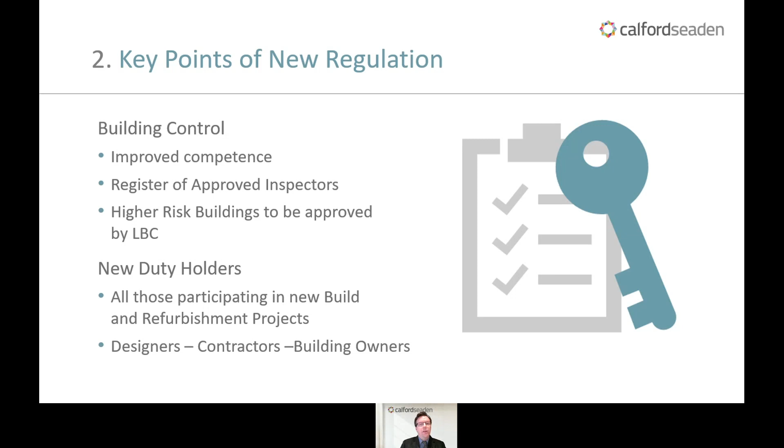Building control will undergo reform through improved competence. There will be a register of approved inspectors, and all work to high-risk buildings will need to be approved by local building control and not an approved inspector. There will also be a list of new duty holders, which will include all those participating in new build and refurbishment projects and are defined as designers, contractors, and building owners.

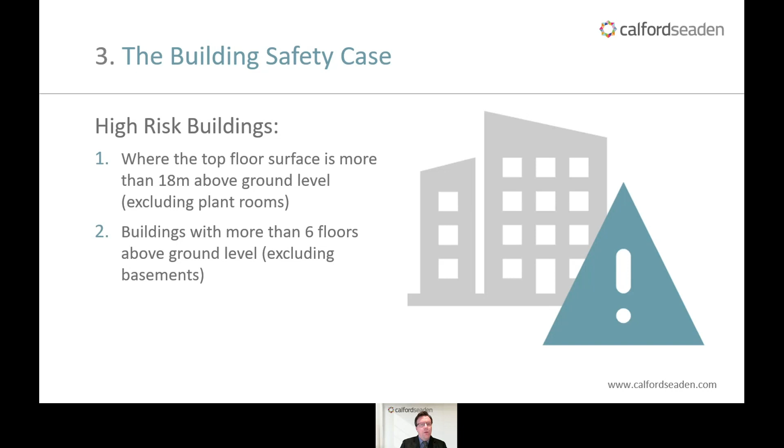The building safety case encompasses and is effectively the golden thread. It will only relate to high-risk buildings, which are defined in the bill as buildings where the top floor surface is more than 18 metres above ground level, excluding plant rooms, and or buildings with more than 6 floors above ground level, excluding basements.

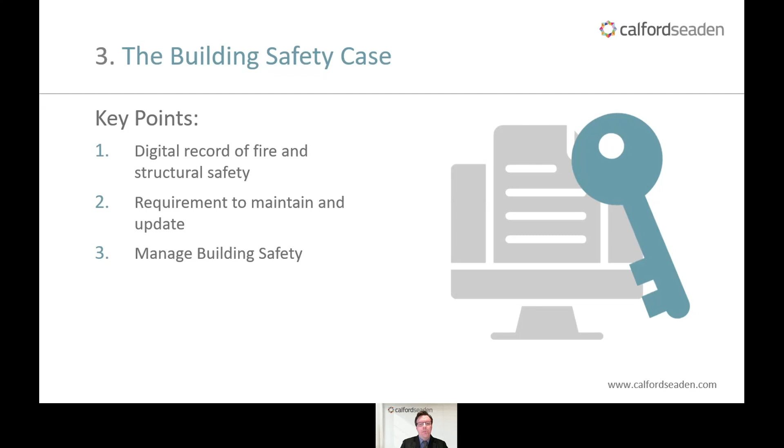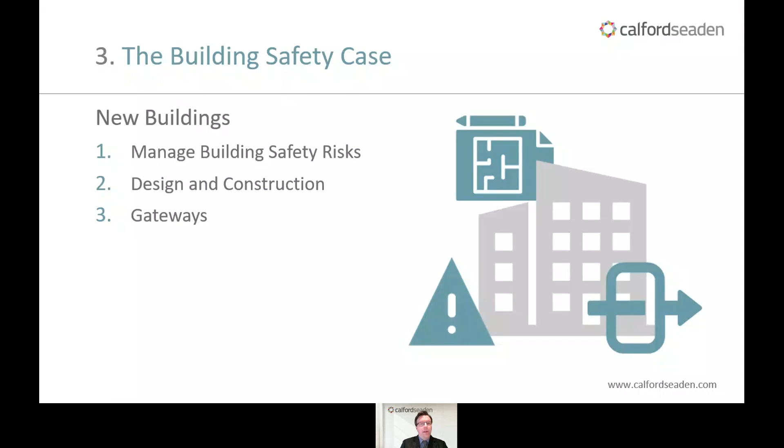The key points of the building safety case are that it is a digital record of fire and structural safety. There is a requirement to continually maintain and update the information, and the purpose is to provide the person responsible for the building with the information required to manage building safety throughout the life cycle of the building. In new buildings, there is a requirement to manage building safety risks at all stages of design and construction in the form of gateways, and Bob and Varun will discuss these in more detail later in the presentation.

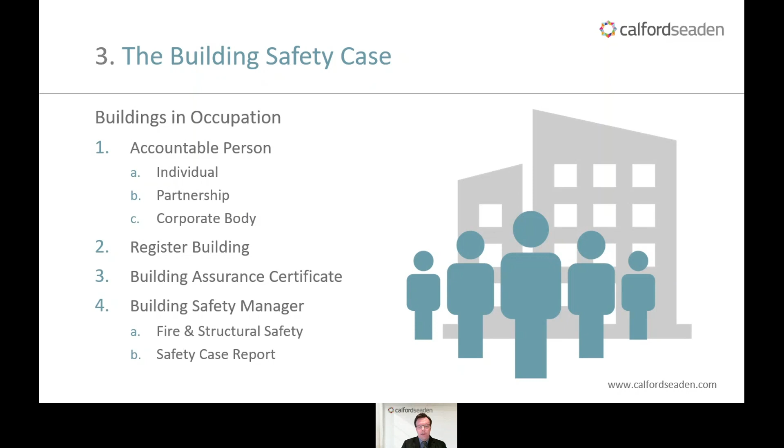For buildings in occupation, there is a requirement for an accountable person to be put in place. There may be more than one accountable person, and these can include an individual, a partnership, or a corporate body. They will be responsible for registering the building and applying for the building assurance certificate. Finally, the accountable person will be required to appoint a building safety manager, who can be an individual or organisation, and their principal role is to assist the accountable person in the day-to-day management of fire safety in accordance with the safety case report.

The safety case report is the document issued to the building safety regulator to apply for the building assurance certificate, and makes the claim and argument for residential safety and answers the question: can you identify the building safety risks in your building and show me how you manage these on an ongoing basis as far as you can so that it is safe.

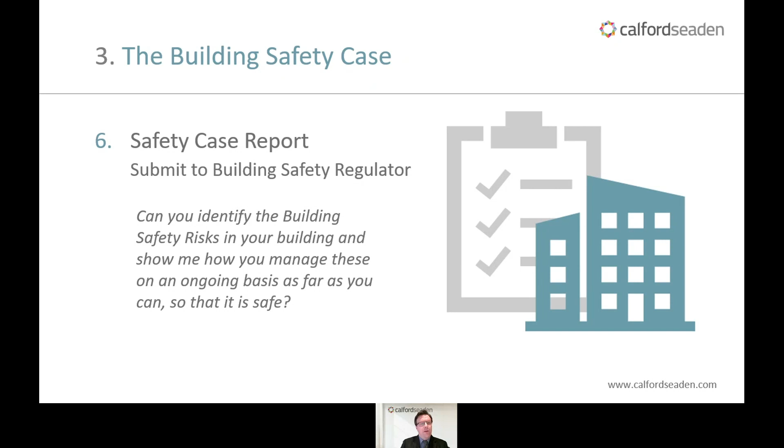So how can we help? Well, we are currently working with various providers and within calfordseaden to prepare safety case reports, and we are gathering the information and are familiar with the process. However, as the building safety regulator has not yet been put in place, we are reviewing the guidance and preparing the safety case reports, and we are continually developing and updating the processes and are confident that they are robust.

To demonstrate this, we are taking the lead by issuing clients with an information tracker, which is a comprehensive but not necessarily complete list of documents and information required. The list is continually updated and revised, and additional information included to ensure that it is tailored to your property. The information is reviewed for completeness, and this is backed up by our surveys, which will firstly be discussed by Jenna. So I'll now pass you over to Jenna, who will provide further detail on the building services surveys.

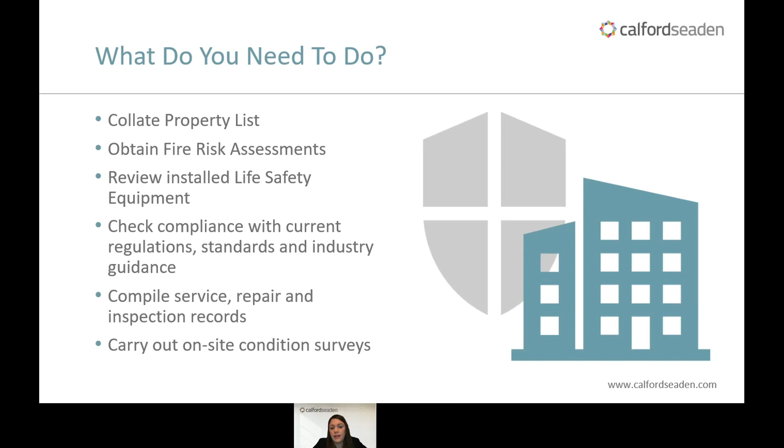So how will this be achieved? You will need to collate your property list and identify the high-risk properties within your portfolio. Obtain fire risk assessments, review the existing installed life safety equipment, check compliance with current regulations, standards and industry guidance, compile servicing, repair and inspection records, carry out a condition survey and plan for life cycle replacements. I'm going to talk to you now about the M&E systems which are considered life safety and what is expected to be included in the safety case report.

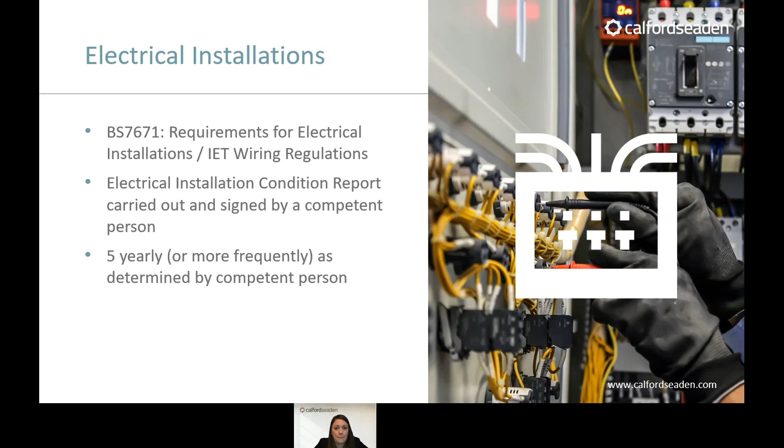So servicing of your electrical installations within your building. This will be in line with BS 7671 and the IET regulations. Compliance will be demonstrated by a satisfactory electrical installation report. The report must be signed off by a competent and qualified person and cover 100% of your system. Next slide, please.

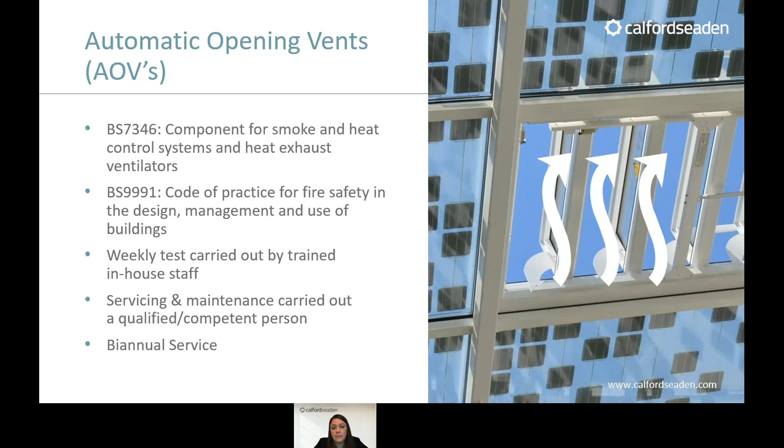Automatic opening vents. Servicing should be carried out every 6 months by a qualified and competent person to meet BS 7346. You should also carry out weekly tests by in-house staff. Next slide, please. Compliance of dry and wet risers to BS 9990. Servicing will consist of 6 monthly visual inspections and an annual pressure test.

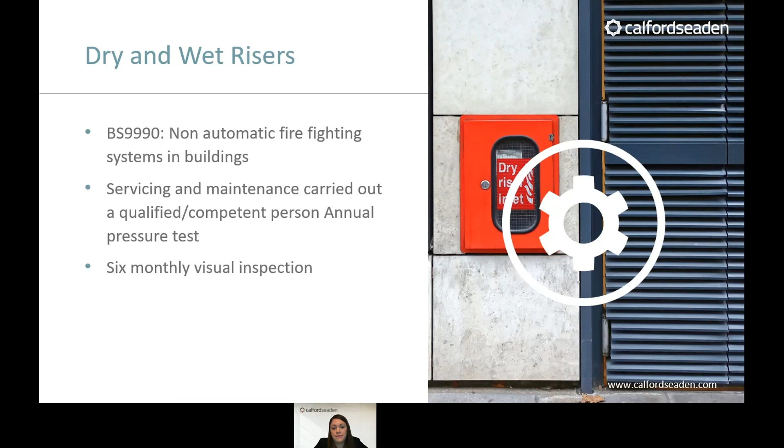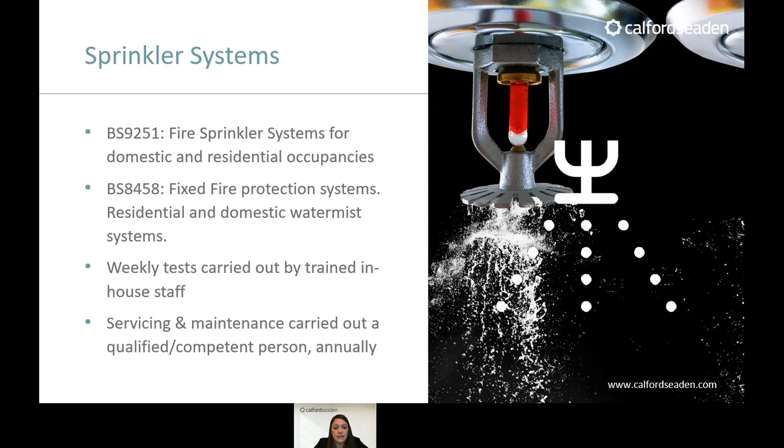Next slide, please. Sprinkler systems. Weekly tests should be carried out by in-house staff, and an annual service must be carried out to meet British standards. Next slide, please.

LOLER requires a lift to have a thorough examination by a competent person twice a year for passenger lifts. All priority lifts should be maintained and examined to ensure their technical features and controls remain in good working order, in line with the Regulatory Reform (Fire Safety) Order 2005. Next slide, please. All ducted ventilation systems and fire dampers should be serviced regularly, in line with BS 9999. Next slide, please.

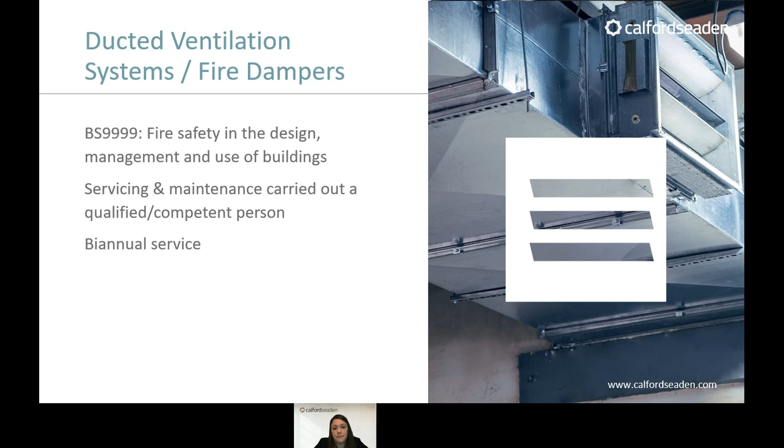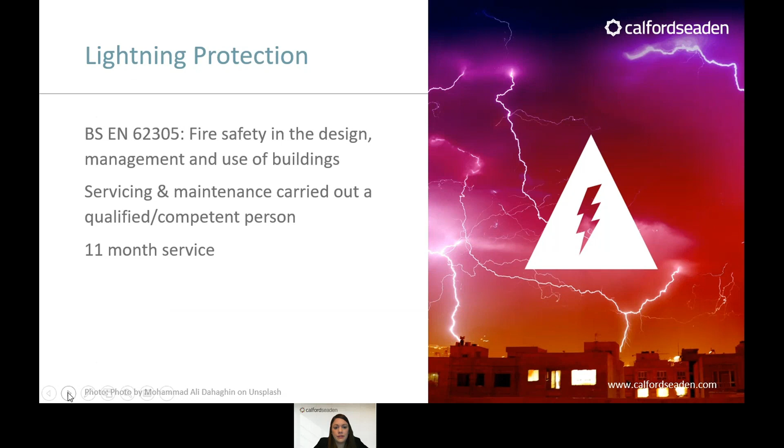And an 11-month service should be carried out on lightning protection by a qualified and competent person to meet British standards. Okay, next slide, please. So to summarise, for each of your high-risk properties in your portfolio, you will need to identify all mechanical and electrical life safety assets in each property.

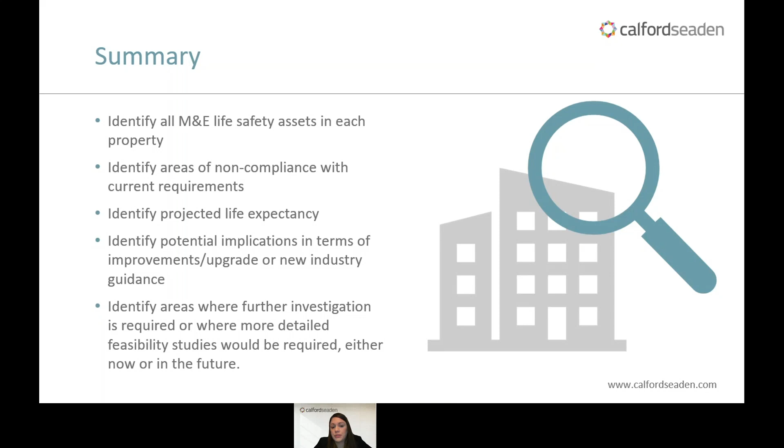You will need to identify all areas of non-compliance and carry out necessary remedial works. Identify life expectancy of your assets to ensure you have budget available for capital replacement to avoid system failures. This will be an ongoing process that will need to be maintained and documented at every stage to ensure the golden thread of information is continuous throughout the whole life cycle of your property. Potential non-compliance issues should be identified early and also areas for further investigation. Next slide, please.

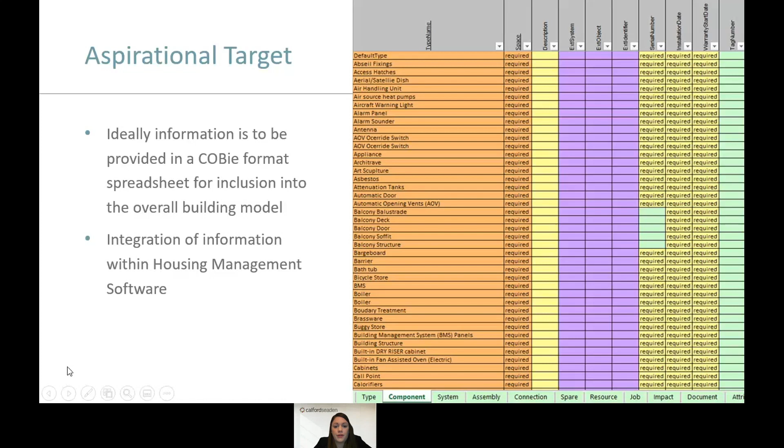So what is the aim? Varun will talk to you further today about collating all of your property information in a COBie spreadsheet so it can be included in the overall building model. An efficient way to collate your information required for the building safety case could be within your housing management software, as it is a central location that can be easily accessed when required. We are in discussions with several housing software providers on how they incorporate COBie data.

Next slide, please. We have discussed all of the mechanical and electrical items in your properties relating to life safety. However, there are other critical mechanical and electrical items that should be considered and addressed at the same time as examining the life safety assets. These include gas heating and hot water plant, landlord lighting, water hygiene, door entry systems.

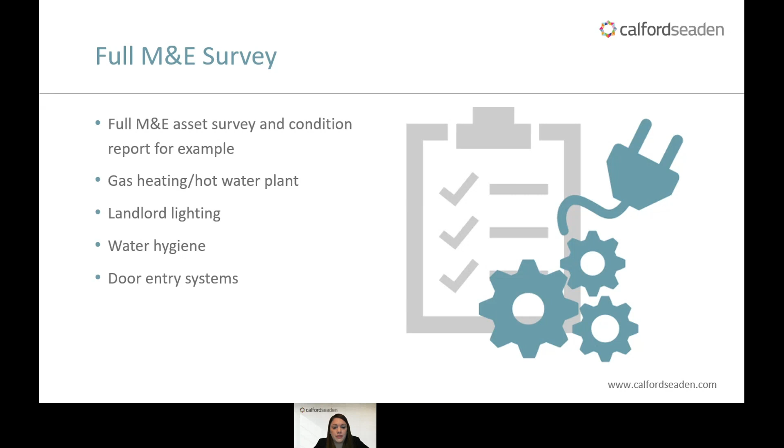For those who don't know me, I'm Bob Terry, Head of the Civil and Structural Engineering at calfordseaden, and I'm here to provide some advice on the implications of the Building Safety Bill from a structural perspective. Right. From a structural perspective, the main implication is that at planning, or Gateway 1, there will be the need for all applicable buildings to have fire tender tracking included as part of the planning submission.

Before construction commences, which is Gateway 2, there is now a requirement for a full plan submission to the new Building Safety Regulator. The current requirements for full plan submission include for the provision of structural calculations. So the inference here is that they should be submitted to and approved by building control before any works commence on site. There is guidance from the government on the building safety case currently, which notes that the submission may be phased, foundations, substructure, superstructure, for example, and it is to include drawings and specifications, but it's not 100% clear if calculations are to be submitted and approved at the same time.

If calculations are required to be submitted and approved before work starts on site, there is potential that the time frame from planning submission to works commencing on site may need to be extended to allow their production. There may also be implications as to who is in control of the site when the submission is made, the client or the contractor. If the latter, then there will either need to be the need for the contractor to be involved in the production of the construction information sooner, or there will be a longer lead-in from the appointment of the contractor to the work starting on site.

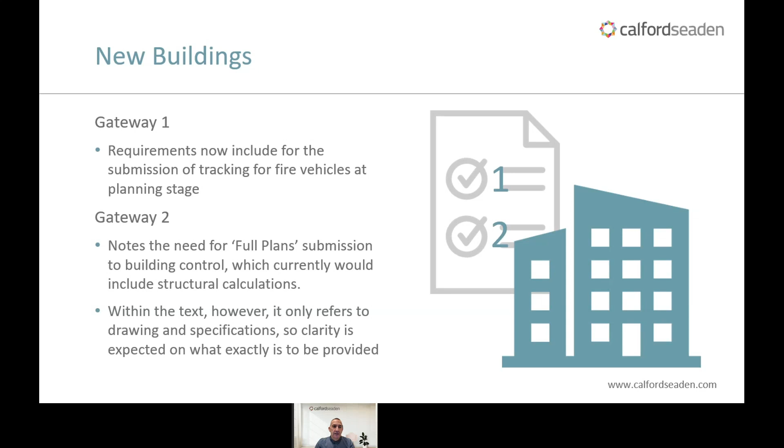For existing buildings, the exact requirements of the building safety report are even more unclear. It is known that a structural inspection report will need to be produced, with subsequent investigations and reports produced on a regular basis. Again, it's unclear as to the periods for such inspections. This report will need to confirm the structural form of the building and highlight any notable defects. If no record information is available on the structure, then there will likely be the need for intrusive investigations to confirm structural form and makeup.

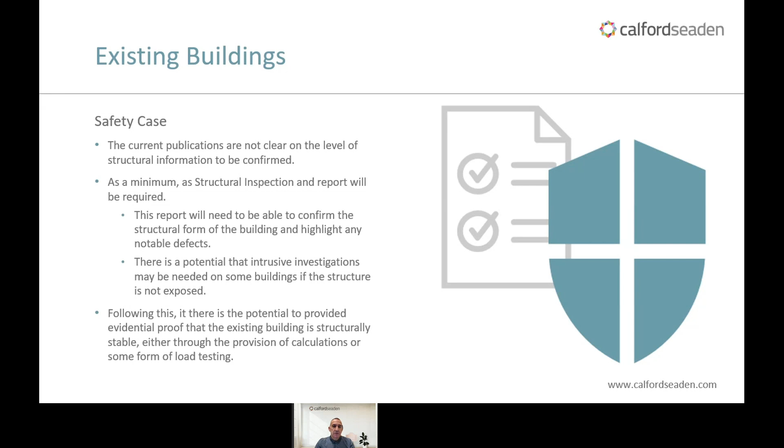It is not clear if evidential proof will be needed for the structural design of any existing applicable buildings either. If it is the case and no record information is available, it may be that detailed structural calculations will need to be produced or some form of load testing carried out to confirm adequacy.

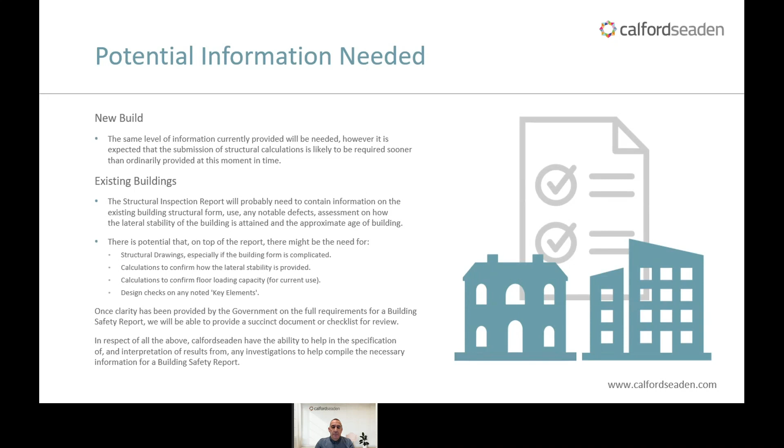Hi everyone. For those who don't know me, I'm Varun and I head up BIM at calfordseaden. I also chair the BIM for Housing Association working groups and I am the advisory chair of BIM for Housing. I sit on the executive team for the UK BIM Alliance, who has a lot of work with the MHCLG at the moment. I also sit on the board for the MHCLG's Golden Thread Initiative and the Housing Asset Data Group, again, which is a project that works with the MHCLG.

So what I'm going to do today is I'm going to talk you through some of the requirements that we're looking at on the Golden Thread and how that works with the gateways.

Next slide, please. After the tragedy at Grenfell, the Hackitt report was commissioned, and some of the key findings were that the current system of building regs and fire safety wasn't really fit for purpose. There was an inherent need for a change in culture to support the delivery of buildings that are safe, not just for the future, but also for now.

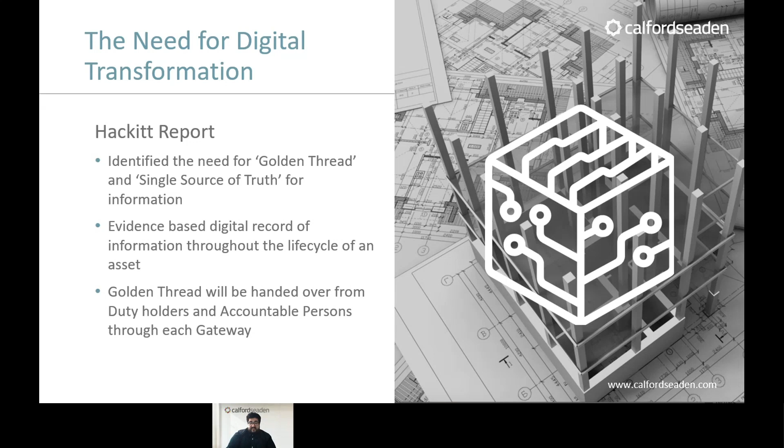And also that there needs to be clearer rights and obligations for residents to maintain fire safety, one of the core being that they need to work in partnership with the duty holder of an asset. The other area that was really focused on within the Hackitt report was the term the golden thread. This term was the need for accurate data, digital data to be specific, throughout the life cycle of the asset.

Next slide, please. From the Hackitt report came the Building Safety Bill. I'm sure many of you have read it, and one of the areas that I looked at was the proposal of gateways in order to produce better quality information which is more consistent throughout the life cycle of the asset. At each gateway, they had specific duty holders which were in charge of creating and producing the correct information at said gateway.

The first gateway takes place at planning, and the duty holders would have been the client, the lead designer and principal designer. The aim of this gateway is that a planning application will be able to demonstrate any fire safety requirements, and they need to be shown to consider a fire strategy within their proposals. At this gateway, you will find that the building safety regulator will also have a specialist fire safety input. They'll be working quite closely with local planning authorities in order to go through the approval processes.

At gateway 2, we'll find that that takes place just before construction begins, and the principal designer and principal contractor will be the duty holders. At this gateway, before a package or a phase of works begins, we need to have a full set of plans, including the detailed specification in relation to how structural safety and fire safety risks will be managed and mitigated. There also needs to be a 3D digital model of building information, which is meant to be as planned, and it should have the construction products that are going to be used.

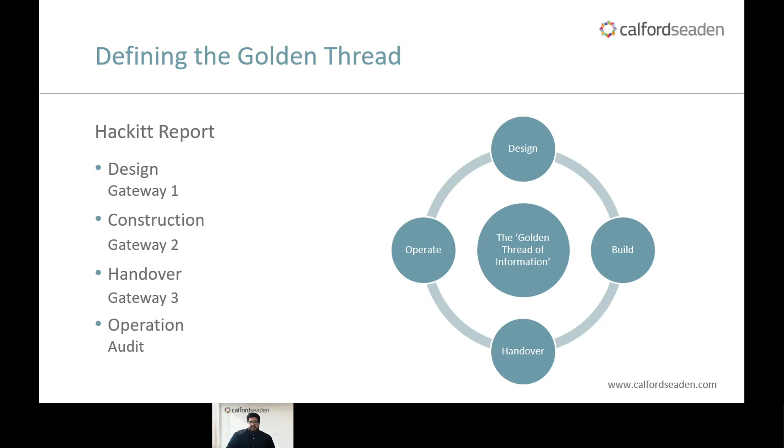So one of the big British standards coming out of the golden thread is going to be BS 8644, and BS 8644 really is just about the digital management of fire information. The core of this is that it's going to be looking at utilising an already existing framework, which is going to be the UK BIM framework, to manage fire safety information throughout all stages and life cycle of a building.

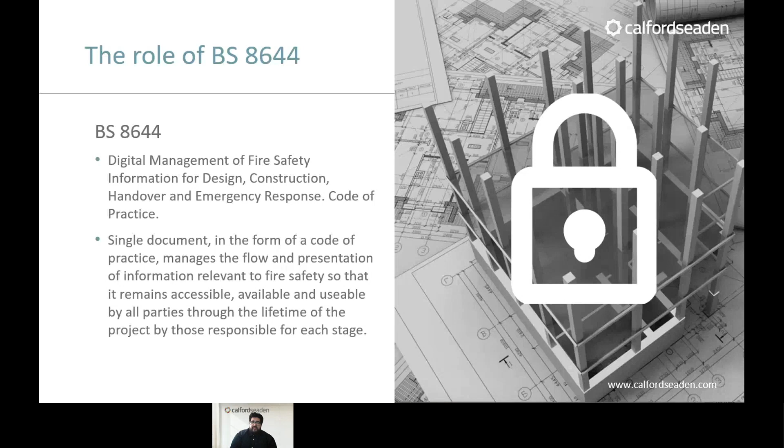And it aligns very closely with the ISO 19650 standard series, which is an international series looking at information management. These are the current BIM tools that we use within the industry already, so that's why they're aligning to this. The BS 8644 and the Building Safety Bill will go hand in hand, and they both inform each other.

Next slide, please. So in order to achieve the information for ISO 19650, there are certain core documents and certain software that we do recommend that you look at within the organisation. First one being that you need to have some organisation information requirements. This will set out your BIM strategy within your organisation, your information management strategy, and basically showcase why you're doing BIM.

The next part is your asset information requirements. This will define exactly what will be required within your asset team, your building safety team, and it will help develop the exchange information requirements. The exchange information requirements basically are handed out by an employer to the design and construction team to say, this is what we require, when we require it, this is the information exchanges we need, and showcases all the information we require for the ISO 19650 standards.

Along with that, you will have COBie data. COBie stands for Construction Operation Building Information Exchange, and I will talk about it in the next slide. But basically, this is an international standard that breaks down all the components, the types of information, all attributed information and documentation that will be required.

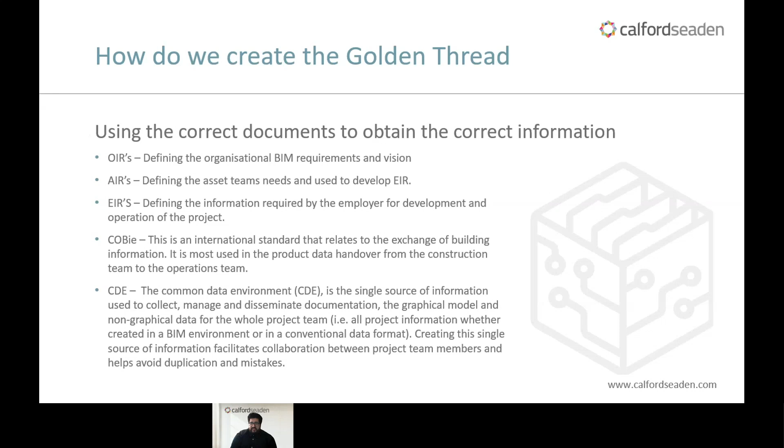And the next part to look at is the common data environment. In order to maintain something called a single source of truth in that golden thread, it's important that the common data environment is brought early on into the client's project, and not just when a contractor comes on board. It's so that you will have up-to-date information throughout the project, which is imperative for any project trying to realise the golden thread. Next slide, please.

So as I was saying, COBie is an international standard, and it stands for Construction Operation Building Information Exchange. A lot easier just to say COBie. I don't think anybody wants to remember all them words, but the whole point behind COBie is, it's not about asking for more information. It's asking for structured information of the information we already ask for. It's about being able to present it and reuse it within the asset systems a lot easier.

As Jenna led on before, we are working with a lot of the asset management software providers in order to make sure they are able to take on COBie, so that it should be a seamless transition from development and construction to the asset management and operation of an asset. This is all about improving how information is handed over in a digitalized format.

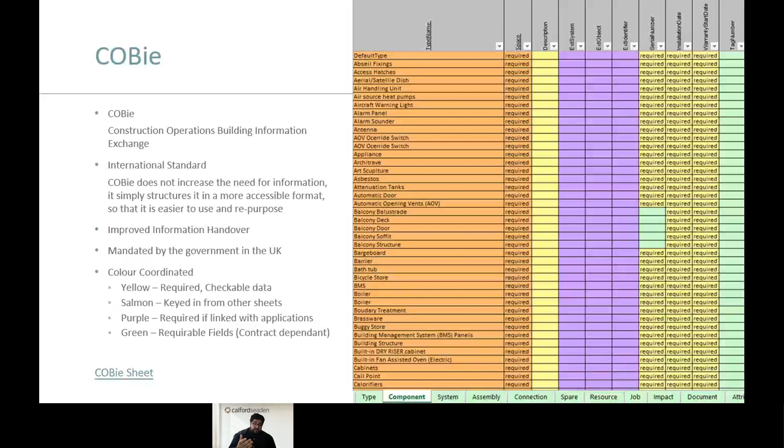What we mean by that is you can put in all your documentation from test certifications, product photos, and technical information and O&M manuals within this spreadsheet. Again, it creates that single source of truth. Next slide, please.

That was just a little overview by all of us. So we hope you found that useful.